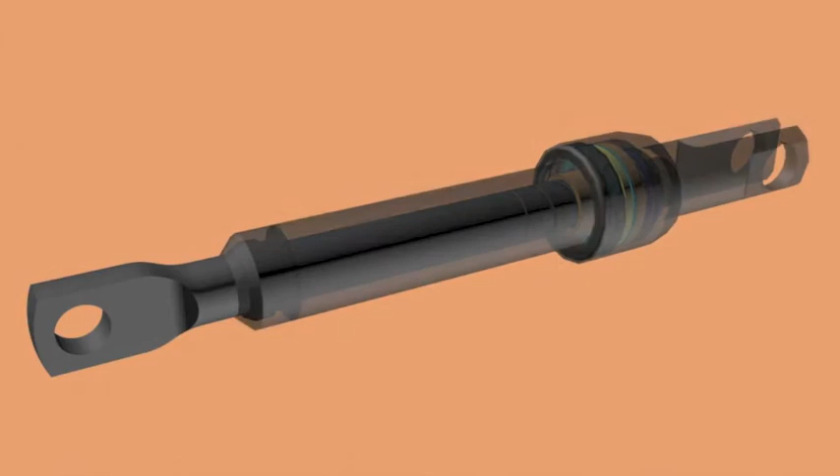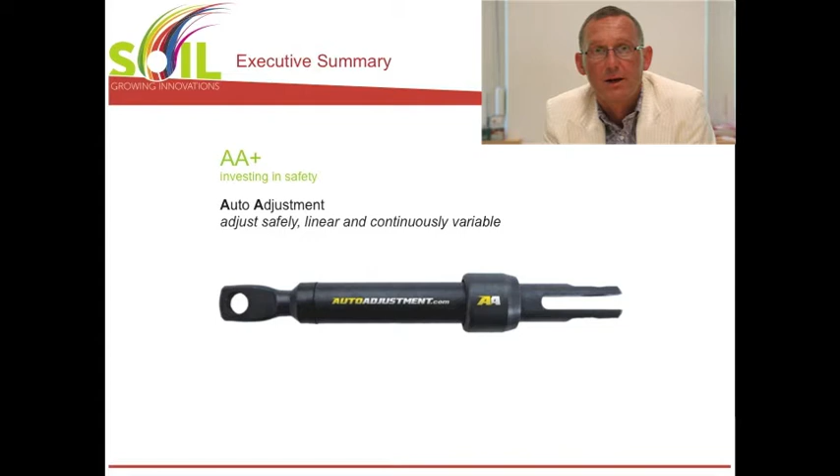We're discussing the automatic brake adjuster. This is a system used in different brakes for linear, continuous adjustment of the brake.

The basic idea of the inventor was to convert a length movement into a rotation, and therefore to adjust the longitude of the auto adjuster.

The story so far is that since 2008, more than 20 types of prototypes, generations of prototypes, were realized. There are about 5 different applications on the market, and this adjustment is used for drum brakes and disc brakes as well as in trailers and trucks.

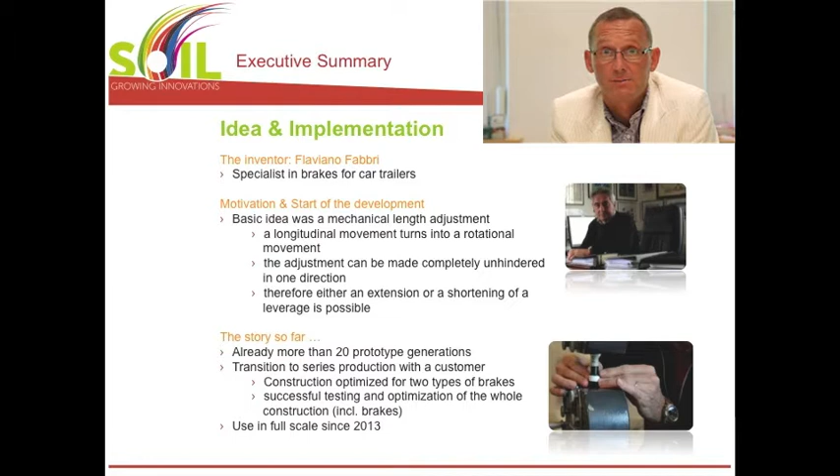So what are the key advantages of an automatic adjustment? First of all, it's comfortable because you have no more manual adjusting of the brake system. Second, it's very safe because you've got a constant braking power on all wheels.

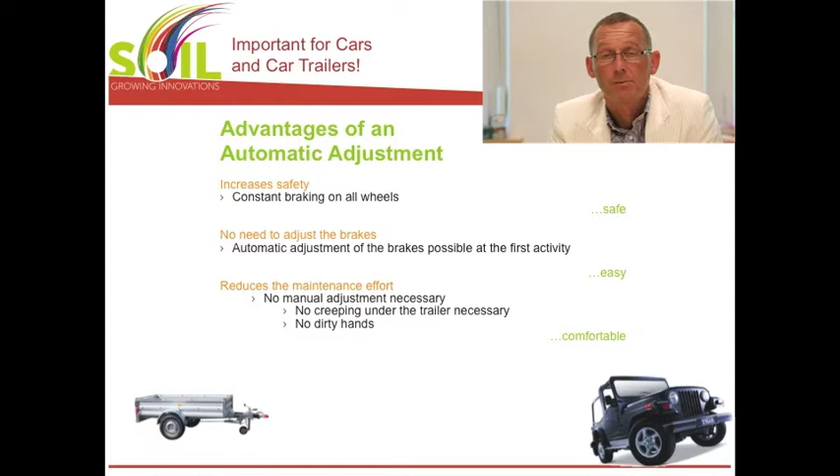And the third thing is we have a self-adjusting system. This means after installation of the system, it simply adjusts itself during the first usage.

The key advantages of this patented construction are that it's more reliable than other automatic adjustments because of a very simple mechanism and the linear idea behind it. Second, it's a lot lighter, which means in times where the weight of a car or a truck is important, a simple construction with low weight is quite interesting. And because of the parts involved, it's quite a cheap solution, which always helps.

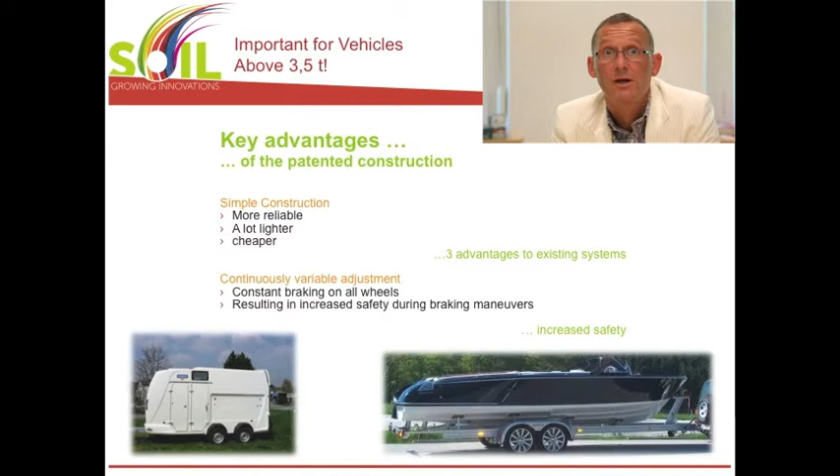The first potential application is for hydraulic drum brakes. This is where the system was first invented and tested. You use this sort of brakes, for example, on heavy trailers, for boats, horses and so on.

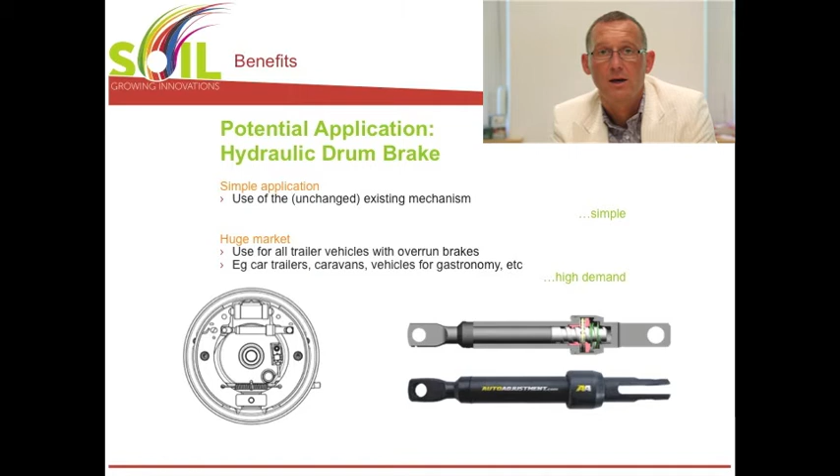So typically you've got more than 1.5 tons, and you use those braking systems, for example, as an overrun brake.

The second application was in pneumatic disc brakes. The system is already in use. This time it's a bit different because you have to integrate the adjuster into the modules, which means it's fully integrated within the brake system, but it does the same function, although the construction is slightly different. This system is used in about 4 or 5 variations, so it's got some heavy usage already.

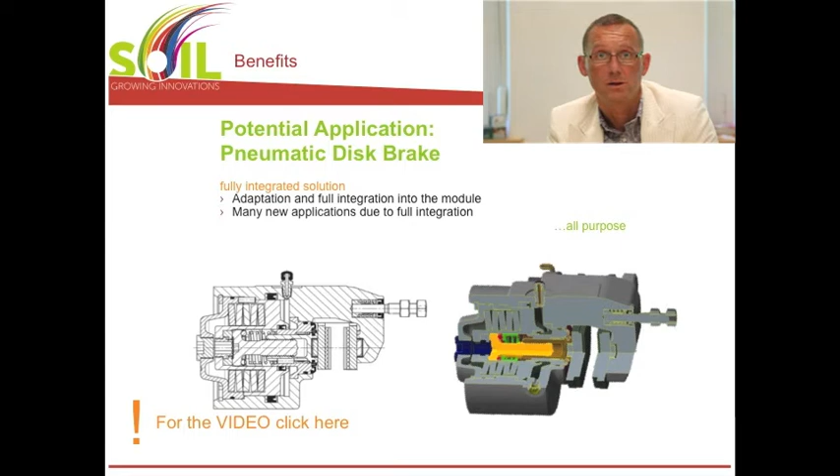You use pneumatic disc brakes, for example, in smaller utility vehicles, light commercial vehicles, light utility vehicles. This means it goes up to, let's say, 5, 6, 7 tons total weight, and you're able to use the system in the main car or truck, or in the trailer as well, because normally both the truck and the trailer use the same braking system.

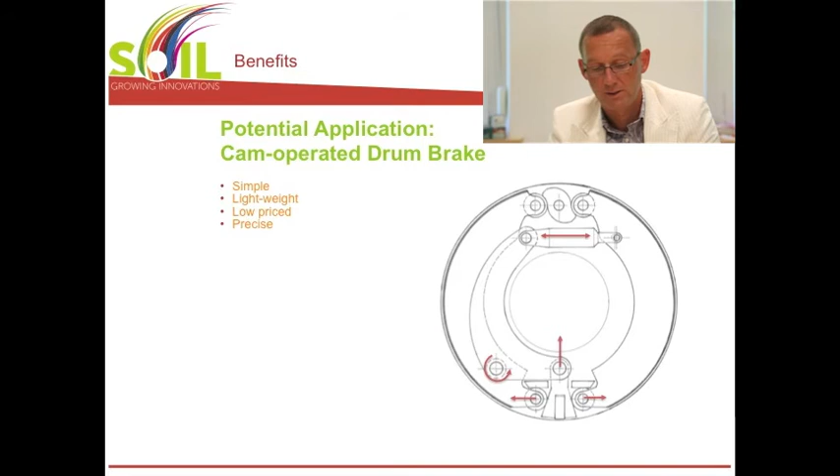The third possible application is special drum brakes, the so-called cam-operated drum brakes.

When did this project start? Well, Flaviano Fabbri had the first idea in 2006, and he filed the patent that year, so he started working on potential applications in 2006.

Very fast, the first prototypes for use in drum brakes were developed, and it was a constant prototyping cycle—new prototype, testing, new prototype, testing.

So in brakes the system is quite established, but Mr. Fabbri also wanted applications outside of braking systems. We now found the first application, which is still, let's say, quite secret—we have an NDA running there. So there is a use of this adjustment outside of brakes, but within the braking sector we've got more than 8 years of experience, some 100,000 miles on cars, trailers and trucks, and well-established systems, even working with anti-blockage systems.

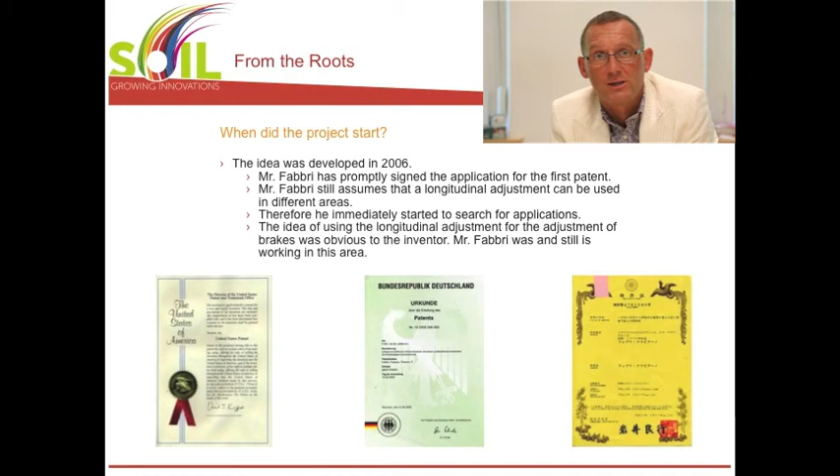So what about testing? Well, the parts were used in tensile testing. The result is it's not very critical, because the system is constructed in a way that the parts are not really in a high pressure situation, and it was shown that you need some 100 kilos to break the components. So this is no problem at all.

From the duration of the parts, what we know is you can use it as-is without any service and inspection, and the parts were tested for more than 100,000 kilometers and more than 100,000 miles, as well for the pneumatic disc brakes and the drum brakes.

And for systems like the anti-blockage system, there was heavy testing involved, even on special testing devices. So we've got a good idea of which prototype, which product worked rather reliably and what didn't work as well, and we are able to give this information in addition to the license granted, which helps you engineer your solution for your truck, your trailer, whatever it is. You get a fitting system.